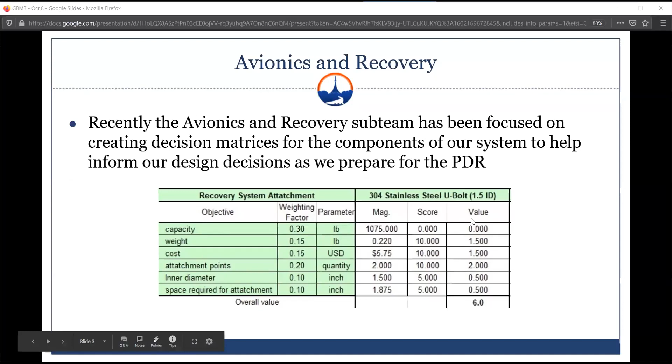Can I control the slides? Or? Just let me know whenever you want. Okay, so yes, could you change the slide, please?

So part of our decision matrices we made last week was for shock cords. So could you go to the next slide, please? This is the matrix that one of my team members made for shock cords. He wasn't able to complete it for our meeting yesterday, but he finished it last night. And we were able to talk about his different objectives yesterday. So the objectives that he assessed were strength, the length of the shock cord, durability, width, and price.

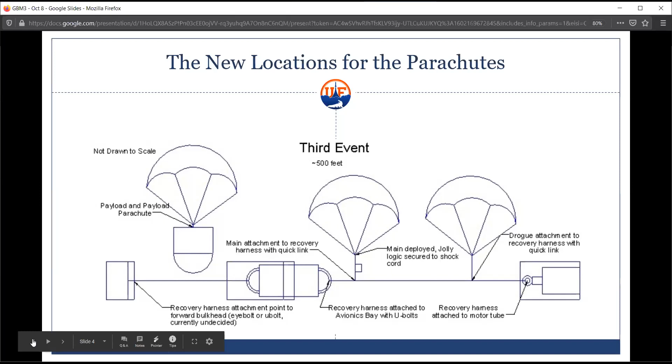Joel, would you mind going back a slide? Just real quick, or another, or yeah. Did you guys test for the coefficient of drag for that parachute? Or can you go forward a slide to the design matrix? The coefficient of drag for the shock cords? Oh my god, yeah, I'm off. But yeah, I'm completely off.

But quick question about the parachutes. Did you factor in their coefficients of drag? Just real quick. In OpenRocket, yeah, I told Matthew about them. Yes. Okay, just making sure, because that's pretty big, and it's something that's not really shown. I know for some parachutes it just gives you the drag rate, but that's really not useful, comparatively at least. Mm-hmm. Right. Yeah, I know Wildman does post all of their CDs, so just double check based on their website and make sure that it's in there.

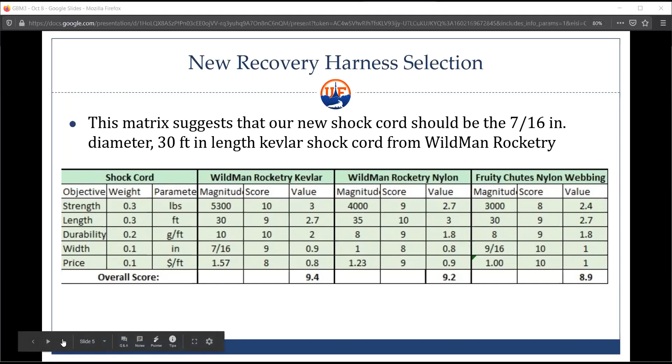Okay. Are we good with avionics? I have some questions. So did you calculate the drift radius for the payload and for the rocket? Yes, we did calculate the drift radius for the rocket. I have not calculated the drift radius for the payload. If you could do that, because it needs to be under 1 kilometer, if possible. The drift radius right now, I believe, with 20-mile-per-hour winds for the rocket is 0.4 miles.

Okay. Yeah, so is it a handheld controller, or is this going to be a controller setup where we're going to have it on a table? Alexander. So basically it's a receiver that just has a composite video out. And so it could be a laptop, whatever device we want that can take composite video is what we're going to be using. So whether that be an old-fashioned TV or just a simple monitor, like composite to HDMI to a monitor, something like that.

It's worth noting that I believe the launch pad is like 500 or maybe even 1,000 feet away from where you're supposed to be standing, and where our setup for all of our tools and stuff is going to be is way farther than that. So yeah, the launch pad is pretty far from where you'll be standing, so you should try to factor that into your drift radius, I suppose. Yeah, and then do you also have the kinetic energy for the payload at impact? No, I do not.

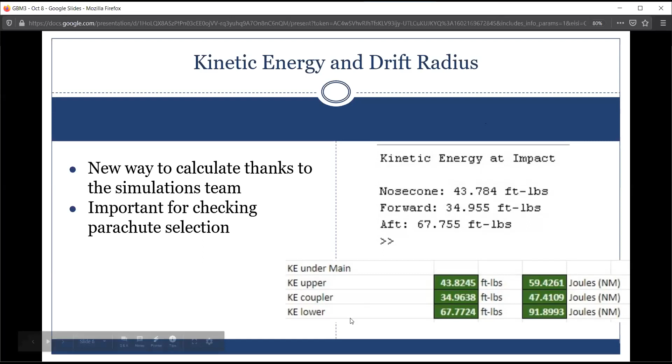Okay, so we have testing now. Okay, hey guys, I'm Megan. I'm the testing lead this year. So the testing subteam mostly has been working to finalize the testing plan for this year's project. And that's something that's been developing along with the design, because we don't particularly design one of the particular components of the project. We more just go through the project, analyzing different things and picking specific things that we really want to focus on for testing.

So right now we have a list of 28 tests, but we have more. We're just trying to incorporate everything together and combine it all to make the final plan. The things that we focused on the most at the beginning were tests that would test the structural strength and make sure that the rocket was recoverable and reusable and all of that stuff. That was what we did most early on in the year.

We also put a big focus on the separation and the parachute deployment and the parachute packing, because, like Colin had mentioned, or maybe it was Dylan, that was something that last year maybe we didn't highlight enough. So we want to focus on that a lot more this year and make sure that we do a lot of separation tests to make sure that the configurations for the parachutes are going to work well together and that the rocket's going to separate enough so that everything can deploy properly.

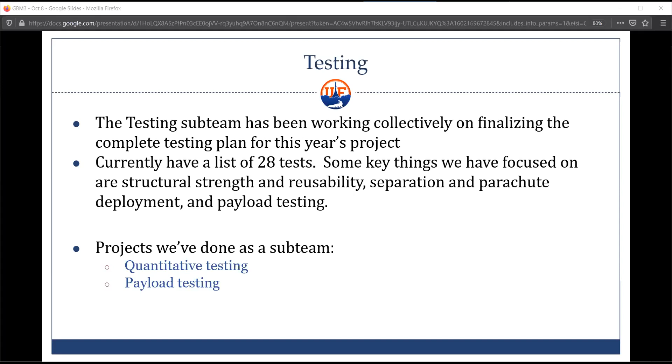But one thing that we did do in between, and I want to let a member of my sub team talk about it a little bit, was go through the plan and try to get some more quantitative tests together, because early on in the project, when I made the initial plan for the proposal, all the tests were qualitative, like, we're going to do this thing and then just observe how it behaves. But we wanted to get some more actual numbers. So I had some sub-team members go through and look at that. So if you want to go to the next slide, Caroline is going to talk a little bit about what they did for that.

So yeah, me and a couple other team members brainstormed some ways to modify the tests to be quantitative so we get actual numbers for the data. Because like she said, the proposal plan was heavy in qualitative and observational tests. So now we have a range of tests that include more numerical data. For example, we could use something like an Instron machine or a force meter to measure the maximum force a part can withstand without breaking, so we can get a number for the force.

For basic yes-no tests, like did it work or not, a way that we could turn that into numerical data is, out of a certain number of trials, how many times does it work, and turn that into a percentage of the times that it worked, to get a quantitative number. Other examples we came up with were quantitatively measuring the distance the GPS can transmit, or calculating force from something like black powder. So those are a few of the things that we brainstormed for quantitative tests.

I just would like to add real quick. I think you guys could do like an Instron test with the shock cord, right? That'd be a good test, like a tensile test. Yeah, that is one of them that we have. Do you happen to know if we have access to any of those instruments in the labs?

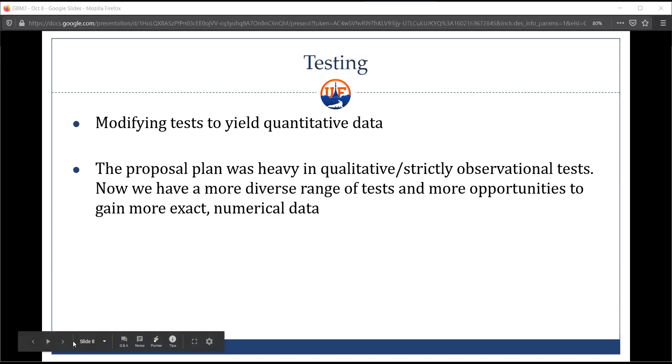As far as the Instron goes, I feel like the MAE lab teachers or professors would definitely be able to do that. That doesn't seem that far-fetched. Yeah, we did that last year, and I think that Lucas knew someone that he was gonna put me in contact with. Yeah, that doesn't seem as hard, at least budget wise or constraints. It's not that bad. It just depends on what material you're using. That's what I was saying. The shock cord is the best thing for sure. Fiberglass. No, not so much. But yeah, you can go to the next slide if that's all for that one.

So the other thing that we've been working on a lot as the testing sub team is getting together a plan for the payload test. It's almost kind of like a separate plan at this point. I'm almost considering making it separate, one for the rocket and one for the payload. Because we've been doing a lot of work on compiling all the stuff that needs to be tested. As Alex has developed his design, we've been trying to work alongside that. So this past week, I had a list of tests for sub-team members to go through and write up some ideas for procedures for those.

I'll probably be finalizing that this weekend so we can have some procedure ideas for how we're going to test a lot of the things like the VTX and the Raspberry Pi and the control software, some of the things we know we're going to need to test a lot. So we're trying to get together really solid plans for how we want to do that. So we worked a lot on that this past week.

And the other big one is testing the Weeble design and stuff like that. That's probably the thing that we want to get testing the soonest because it's something that we can start testing really soon. So we're hoping to start talking about getting together a prototype so that we can actually physically test it. Once we get the plan squared away, the next thing that we're going to move on to is getting started with that and working with Alex and his team on getting that together.

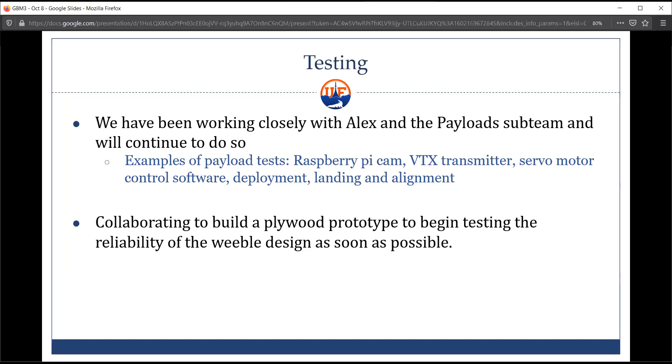Okay, yeah, I see what you're saying there. And I remember that was another thing that Lind had told me. That's why I made the list with reference numbers for all the tests, because he had said that he wanted us to be able to reference the tests throughout the rest of the report if we needed to. So yeah, it's definitely a good point. We should talk to Chaz about that as well. Okay, I'll be moving on to the next slide then.

Yeah, so I'm the structures lead. So at our past meeting, which I held yesterday, like 2 weeks before, I guess, I had people research materials for all of our exterior components. So I had someone find out what we wanted to use for our nose cone. They would do research, see what is available for us for a specific design, like do they have plastic, fiberglass, carbon fiber. And then also find out how we would evaluate what material we wanted. Like why would we want fiberglass over carbon fiber?

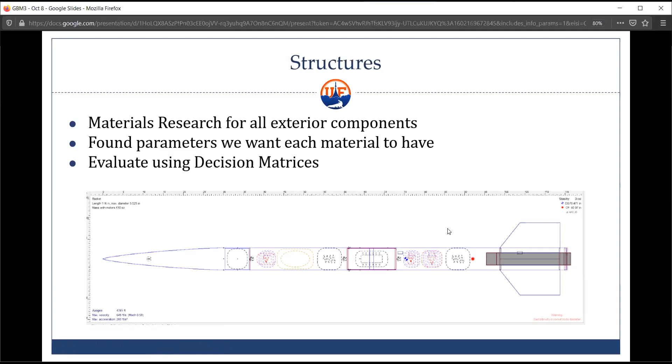So there's different objectives that we want each component to fit in with. So I have some members who are going to talk about what part they researched and some of the parameters they found for it and why it's important that they found these parameters. So Jason can talk about nose cones.

So the two materials I found that were common in nose cones were fiberglass and polypropylene plastic. Fiberglass is stronger and more durable than plastic. It's more expensive though, and it's also heavier, although that might actually be a good thing because we want to move our center of gravity up, which that could act as a heavier thing to pull it up. And then for our decision matrices, some of the things we're looking at are the strength, cost, and weight.

And then also separate from the specific materials, we're also looking at the shape of the nose cone. I found that under transonic speeds, the shape isn't too important and the changes in the aerodynamics are negligible. So a more easy to produce shape or a cheaper shape is probably better. So we're looking at an ogive shape because that's cheaper.

And then cost is weighted more heavily than strength and weight because we just want to reduce the cost, and the nose cone isn't the main thing impacting the ground, although it does need to be able to withstand that force. And then the weight is also important as we want it to not be too heavy, but also still pull the center of gravity up.

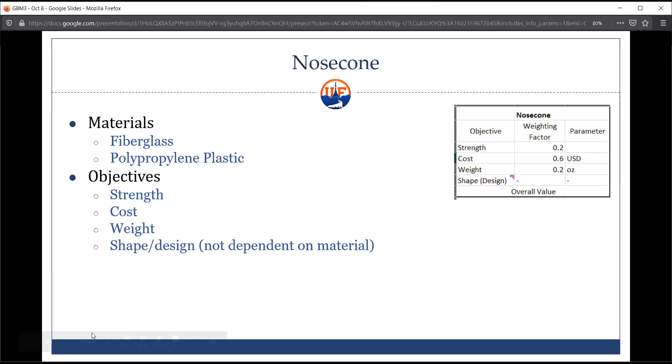So airframes, Maggie, if you would like to talk about these? Yeah, so for airframes, I looked at blue tube, quantum tube, fiberglass, and carbon fiber, and assessed them based on the strength, cost, weight, and machinability. So phenolic has some advantages in terms of cost and weight because it's pretty light and pretty cheap, but it's also not the strongest, and it could be strengthened with something like fiberglass, but that's not ideal because of machinability. And then blue tube is a lot stronger than phenolic because it's less prone to cracking, and it's pretty affordable, but the cost is higher than that of phenolic.

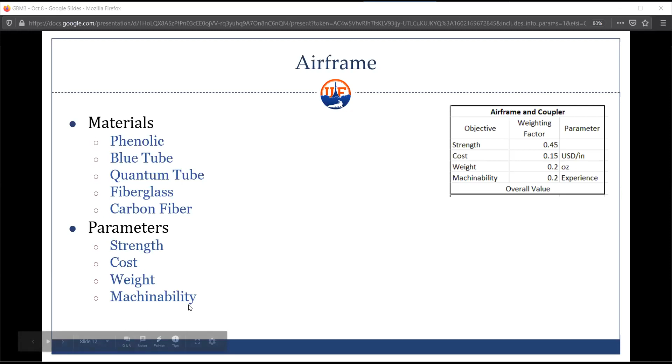Quantum tube is pretty cheap and light, but it's not that good with high levels of heat, so that's not ideal. Fiberglass is strong, but it's kind of expensive and not super light. Plus, machining can be not the best because it can be toxic to breathe it in. And carbon fiber is really strong and light, but it's really expensive, so that's really not great. Yeah, that's all I got. Yeah, so these are the materials we will be considering, and then these are the parameters for our decision matrix.

So fins, so we have Cispan. So for the fins, the materials that were narrowed down to be chosen were the birch plywood, G10 fiberglass, and carbon fiber plates. And narrowing down these three materials, we're looking at the material's rigidity, its tensile strength, its cost, the density, and machinability in order of importance. The rigidity is how well the fin can survive upon impact on landing. The tensile strength, how well it can survive the forces while in flight. The cost, how much the material will cost.

The density, since the fins themselves, in comparison to the rest of the rocket, aren't weighted that much, density should still be looked at, but it isn't weighted as much. And machinability, how easily these materials can be shaped into fins after we purchase them. So yeah, that's all of the components I was showcasing for today. So if you have any questions.

I have a question about the fins. Are you guys evaluating different fin thicknesses as well? No. I'm going off of the one thickness that we were provided. So I was leaving that more up to flight dynamics to determine what the optimal fin thickness would be. And then our job would just be to manufacture it and make sure that we're capable to do it.

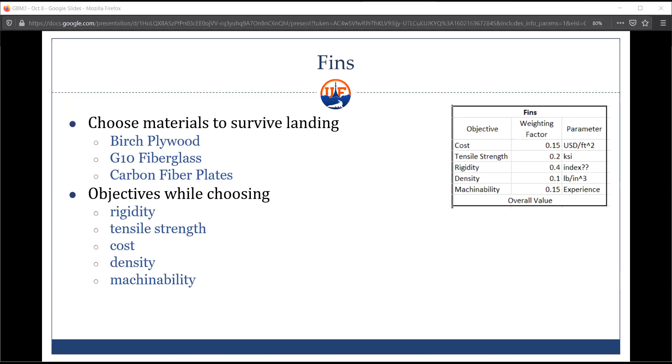If this is it, then this is pretty much the end of it, unless someone from IREC has an update. Yeah, I can just give a quick update about flight dynamics. Would you mind letting me share the screen? Is that possible? Yeah, you should have it. All of the leads are co-hosts.

Okay. All right, so do you see this little fin thing going on here? Yeah. All right, so this is one of the blades of our ACS system, right? This is just one of the blades. What Ansys does, very simply, and what we're going to be trying to use this for the rest of the year, is it breaks down this small model of the blade into small differential elements. So you can see this mesh, right? This is one element right here.

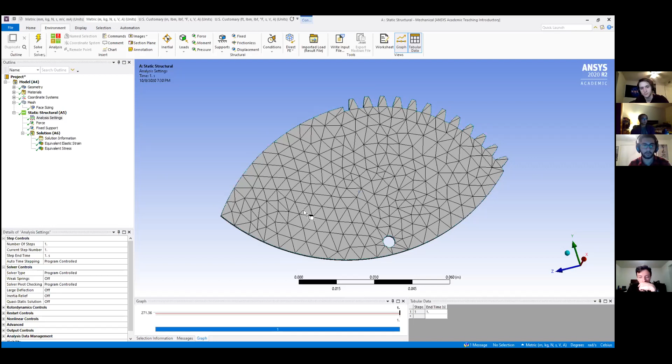And then we can solve for stuff like, for example, the force on this fin by calculating for this small element and using the boundary conditions to get the next element. So what it does essentially is it's breaking down a very big problem into a lot of small problems that the computer is able to solve for us. So what this gives us is, this is our strain. I want to show you the stress. So yeah, here's the stress on the fin.

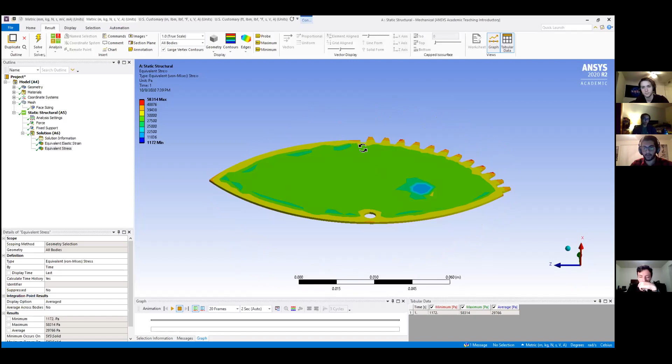This isn't accurate at all, at least when it comes to the use for the team, because this half wouldn't be exposed, right? But I just want to show you guys how Ansys works. And what we're trying to do here is see the stresses, right? So you can see it's localized, it's the most along the edges, which is what we expect. That's where the airflow is. But yeah, if you're extremely interested in this aspect of aerodynamics and flow sim, we're going to be doing more of this over the year.

And we're also doing simulations with MATLAB using Lind's code. We're going to use a MATLAB code to calculate when to deploy the ACS, the altitude control system, so it perfectly hits our apogee. This isn't the end goal, but it's just one of the ways that we're going. So yeah, that was just a little update about flight dynamics.

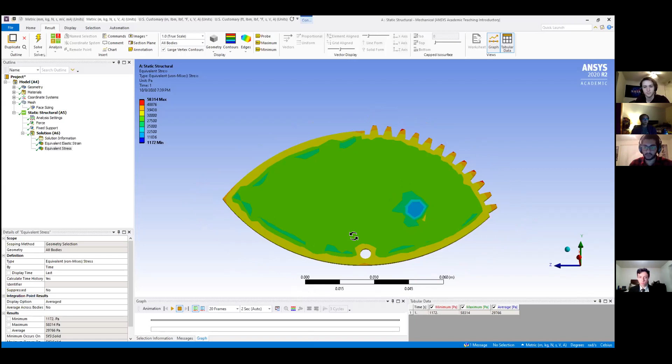I have a general question about Lind's MATLAB code. Does that cover only up until apogee, or does that simulate descent as well?

Not really descent. We can work on making it into descent, but this descent's not the thing. Yeah, it just doesn't cover descent. It wouldn't be that hard for us to do. It'd be a great project for either SL or IREC to implement within the code, just the drift and radius analysis, because after apogee it's no longer a physics balance problem with momentums and stuff. It's more of just a hanging object, like a linear thing. It's not as complicated. But yeah, we can definitely add that if you'd like.

Yeah, I know the SL modeling and sim team made that one in MATLAB. So that's something that we can maybe incorporate into Lens. Yeah, for sure. It could just be added as a function, if anything. Yeah. So very easy. That's a good vector for collaboration.

Okay, I have a question, Bilal. Yeah, go ahead. Was that the final mesh you were using for that part? This is a very fast one, I just want to show you. Okay. But what were you gonna say anyways? Anything I would just be concerned about: it looked like the mesh really wasn't well defined at any of the tip edges, but mostly around that hole. So if it was just quick, I would understand.